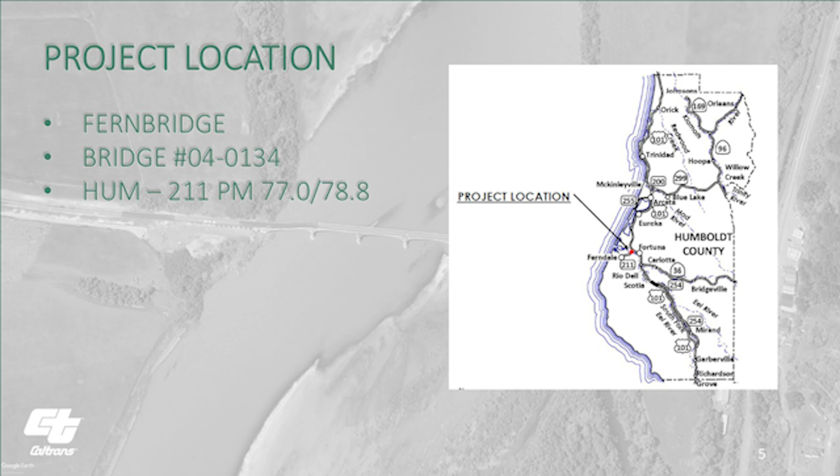Project location, as I'm sure we all know, but it's necessary to always cover this information. We're talking about Fernbridge. The Caltrans bridge number is 04-0134. It's in Humboldt County on Route 211, and post mile 77.0 to 78.8 represents the project limits.

Project background. As you all remember, emergency repairs were made immediately after the December 22 earthquake to restore essential traffic, minimize the extent of damage, and protect the remaining facilities. Once that was complete, and actually in the midst of completing that work, we initiated an improvement project, and we came to you all to announce that initiation of that project to identify solutions that will provide safe, sustainable, and reliable access to Ferndale.

The last portion of the emergency project was the installation of the seismic gates. We have done, I believe, most of the underground work to support the installation of these gates. There on the right, you'll see a rendering from each angle of the bridge that'll show approximately what it would look like.

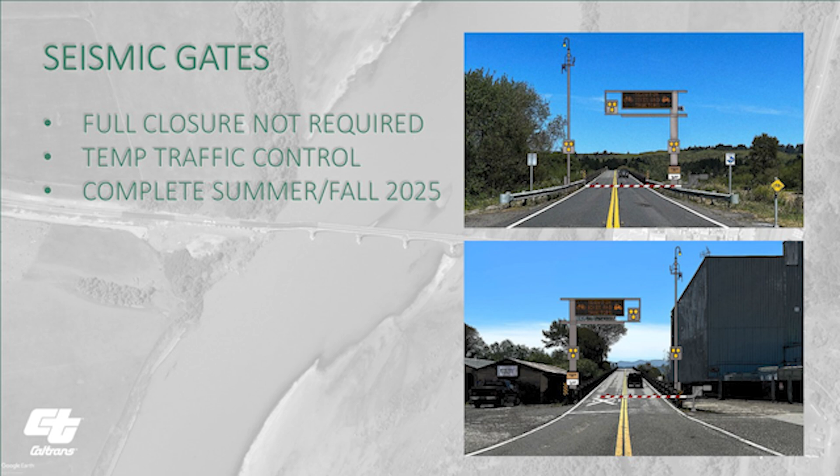We are not expecting a full closure in order to install the seismic gates, which I know is something people were concerned about because that's something we've had to do before for the emergency repairs. We do expect there will be some type of lane closure, but not a full closure. Really what we're waiting on right now is there's been a significant amount of lead time on some of the materials we need to install everything you see above the ground here, and that's really what's driving the schedule to get this work done. But we are optimistic that it may be complete by late summer or fall of this year. Once driving, you will not miss it once they are installed.

In terms of project development, this is also something you've seen in the past. This essentially covers all the different phases of project development for projects within Caltrans. We start in the planning phase with initiating an idea, whether it's, in this case, a bridge that needs some work and needs some repair. And then we immediately move into what's called the project initiation phase, and that's where we've been all these months since we initiated the project.

Now that we are complete with the project initiation phase and we've got what's called a project initiation report, that is also going to be available online for all of you to look at. It's going to include all the information that I will share today, but in a lot more detail. And now that we have that, that's essentially the document that we utilize to go to the California Transportation Commission to ask for the money we need to move the project into the next phase.

That next phase is the project approval and environmental document phase. It is one of the longest phases, maybe aside from construction, depending on the magnitude of a project that you have, which this one is a significant magnitude and effort to build. But in terms of the phases that we are, not building to the end of the design phase, PA&ED is our longest phase. It's where we're writing the environmental document, doing a lot of structural analysis, preliminary engineering, coordinating with the resource agencies, figuring out our mitigation and various other things.

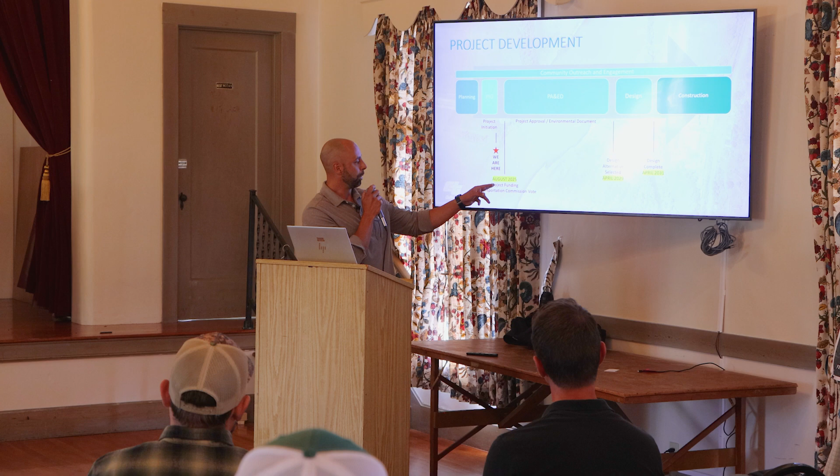Actually, I'm going to back up a slide because I missed that timeline portion. So we plan to vote the funds for the next phase next month, in August 2025. Our target date for completing this project approval and environmental document phase will be April 2029.

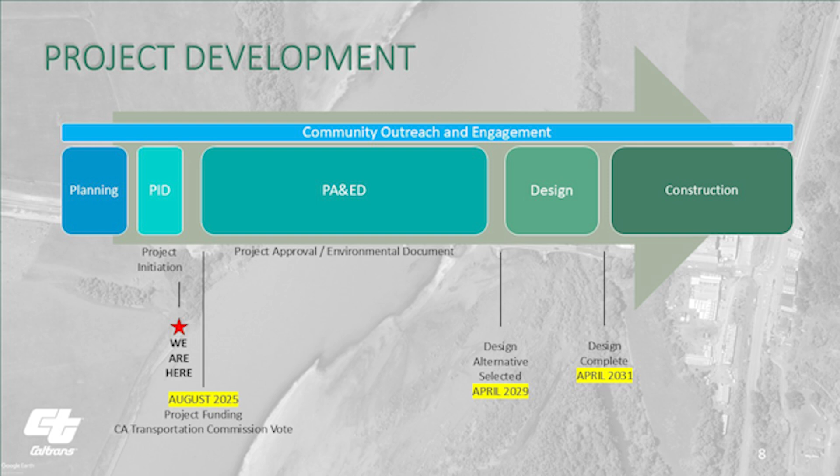So we're looking at just under 4 years to get there. Once we've reached that milestone, our target to complete the design phase would be April 2031, so about 2 years to design. I don't have a time frame on construction, because depending on the alternative selected, that time frame can change—not significantly, but there is a distinction between the different alternatives we'll talk about soon.

Project purpose: every single project within our department has a very specific purpose and need. That purpose and need really puts the sideboards on how we develop a project, what's included in it, and what our objective is and what we're trying to achieve.

The purpose of this project is to restore reliable access to and from the city of Ferndale for all roadway users, which includes providing a structurally resilient bridge that meets current bridge design standards, reducing risk of damage from future events.

The project need: Fernbridge provides the most direct route to and from the city of Ferndale, and on December 20th, 2022, a 6.4 magnitude earthquake with an epicenter approximately 10 miles southwest of Ferndale damaged the road surface and bridge approaches. Monitoring sensors installed on the bridge indicated a permanent change in vertical pier alignment and increases in crack width on piers 2, 3, 4, and 5.

Emergency repairs were made immediately after the earthquake to restore essential traffic, minimize the extent of damage, and protect the remaining facilities. A permanent solution is needed for the bridge to be more resilient and reduce the risk of damage from future events.

So, alternatives. In terms of rehabilitation—and I mentioned this earlier regarding the project approval and environmental document phase—going into this alternatives analysis, as well as the structural analysis that Grant's group is going to be very busy with soon, we still don't really know what the feasibility is of rehabilitating the bridge.

Alternative 1 would rehabilitate the bridge at its existing width, so the width you see out there today would be the width you have post-project, with no shoulders and lane widths of about 11 feet 4 inches. Alternative 2 would rehabilitate the bridge but widen the bridge deck to achieve standard lane widths and shoulder widths, which would be 12-foot lanes and 8-foot shoulders.

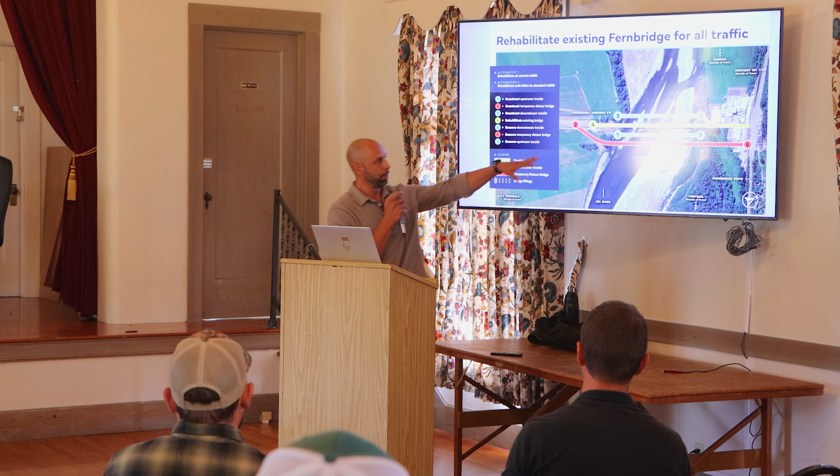This shows you all of these lines, but we are not planning to build 4 bridges, we're just going to build 1. This shows the various steps we would take to achieve the end result. After going through all of these alternatives, I will show you sequenced individual steps, which should help you better understand what's going on. Step 1 is to construct an upstream trestle. Trestles, when I reference those, are essentially just a construction work surface that all the construction equipment would be working from.

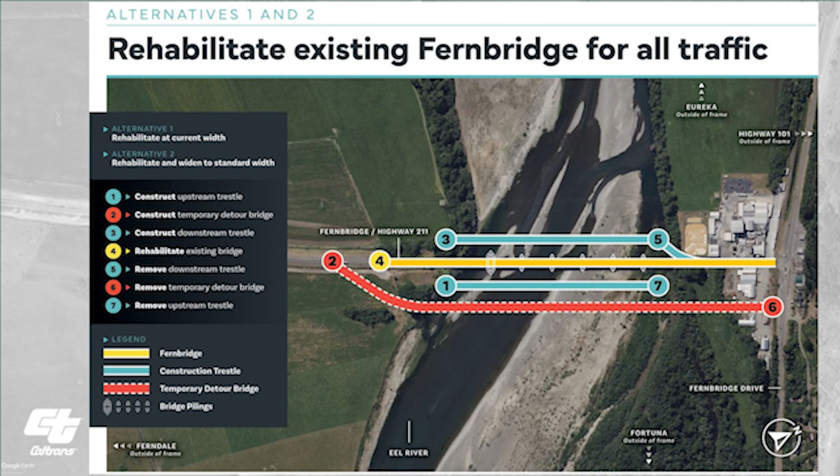That trestle is temporary. Step 2, in this case, we would need a temporary detour bridge, shown in red, and we would construct it next. Step 3, we would construct a downstream trestle to perform work from. Step 4, in yellow, we would do the rehabilitation work on the existing bridge. Step 5 shows we would remove the downstream trestle. Step 6, we would remove the temporary detour bridge in red. And the last stage, stage 7, we would remove that upstream trestle. It'll make a lot more sense once I get to the sequence.

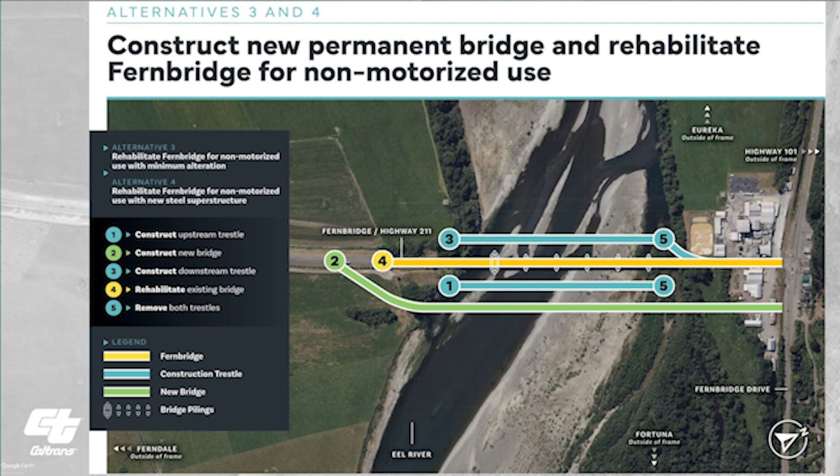Alternatives 3 and 4 are very similar, just one distinction between them. Essentially, they construct a new permanent bridge, shown here in green, and they will rehabilitate the existing Fernbridge, shown in yellow, for non-motorized users such as pedestrians and cyclists. The first stage would be to construct the upstream trestle, stage 2 would construct the new bridge, stage 3 would construct a downstream trestle, stage 4 would do the rehabilitation work utilizing those two trestles, and stage 5 would remove both trestles. You'd be left with a new bridge in green for motorized traffic, and yellow used for pedestrians and cyclists.

Something I wanted to mention is that no decision has been made whatsoever on the location of a new bridge or the location of a temporary bridge, especially for the replacement alignments. It's really conceptual at this point, and that's not even a conversation we've had with the community yet. Adjacent to the bridge is a logical point to put it, but we haven't had those discussions - they will occur in this next phase of the project, and we'll include your input and involvement in that.

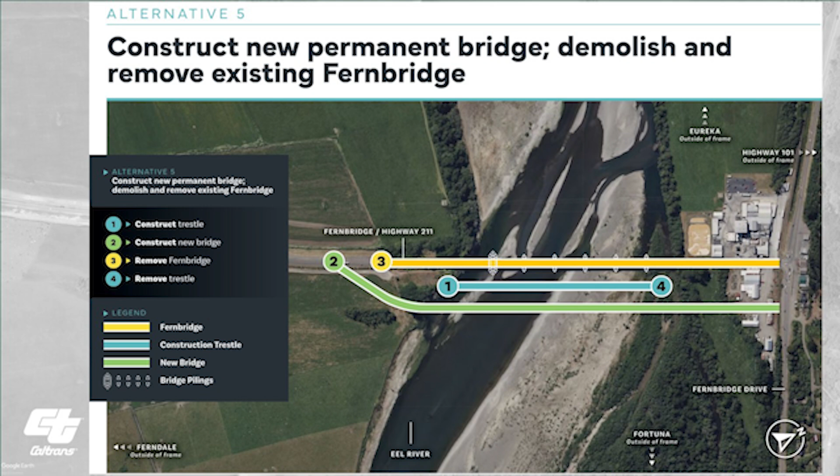Alternative 5 would construct a new bridge, shown in green, and would demolish and remove the existing Fernbridge. Stage 1 would be to construct the trestle in blue. Stage 2, construct the new bridge in green. Stage 3, we would remove Fernbridge, shown in yellow. And stage 4, we would remove the temporary trestle.

Alternative 6 would construct a new permanent bridge and leave Fernbridge in some sort of a monument state. Defining what that looks like has not been decided - it could be leaving the bridge as it stands, or leaving just the piers as something the community could see as a historical portion of the bridge, but that hasn't been defined. There's a lot of conversations that would need to take place about that, also from a safety perspective, with people recreating under the bridge, and you have a bridge that's being left, maybe not maintained, as a historic landmark. So more conversations need to take place about that.

With this one, stage 1 would be to construct the temporary trestle in blue, stage 2, construct the new bridge in green, and then stage 3, remove the trestle. So you'd be left with some portion of the existing bridge as a historical landmark and the new bridge in green. This alternative, in terms of the funding we are going for to the California Transportation Commission, this is the alternative we are seeking the money for.

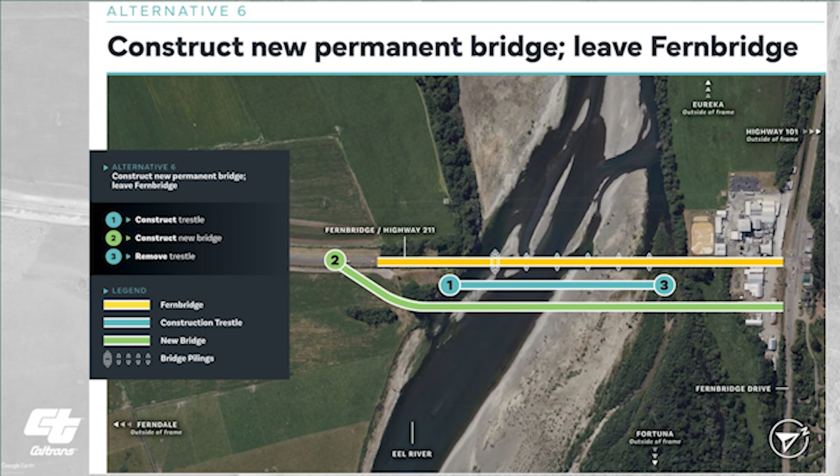Not because this alternative is one the department favors, it's actually the least costly alternative and we feel like it's a good starting point, but in no way does the department going for the money that matches the estimate for this alternative mean that we're locked in any way more so to this alternative than any other. So we have methods and ways to deal with change management when it comes to cost changes and whatnot. But this is the alternative that matches with the funding request we're making next month, as you'll see when you read the project initiation report.

And then the last alternative, alternative 7, will remove existing Fernbridge and construct a new permanent bridge on its existing alignment. So the new bridge would be where Fernbridge is today. Stage 1, construct the work trestle in blue. Stage 2, construct the temporary bridge in red. Stage 3, we would then remove the existing Fernbridge structure. Stage 4, we'd build a new one in its place. Stage 5, we would remove the temporary detour bridge in red. And stage 6, we would remove the temporary trestle.

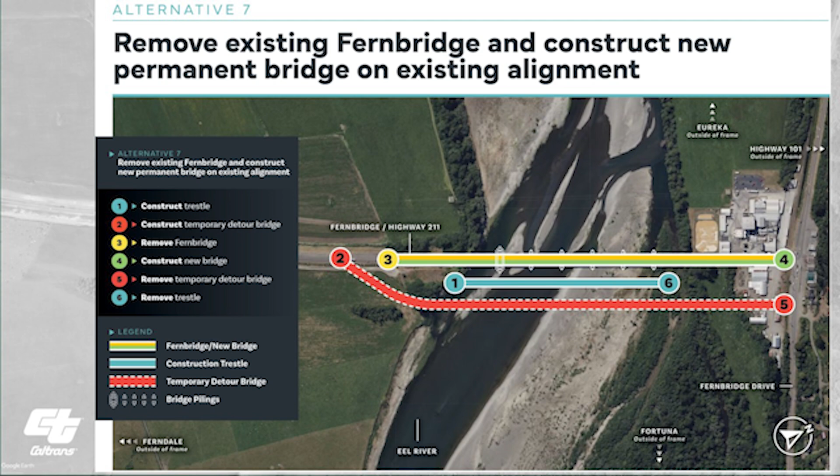Okay, lane widths. I mentioned this when I was going through the alternatives, but here's just a table to show you. Alternative 1, where we are proposing to rehabilitate the existing bridge at its existing width with no widening, would be left with 0 shoulders, as essentially you have out there today, and then lane widths of 11 feet 4 inches, and no separated pedestrian path.

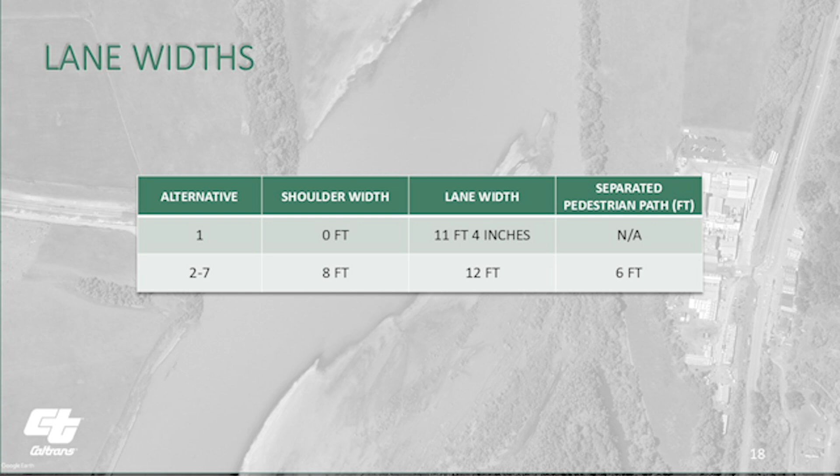Alternatives 2 through 7, for the bridge that you will be driving on, and I want to say that because in 2 of the alternatives we are proposing to convert the existing Fernbridge to a pedestrian and cyclist bridge. But this references lane widths for vehicles. So alternatives 2 through 7, you would be left with an 8-foot shoulder and 12-foot travel lanes. And then we're also proposing a separated pedestrian and cyclist path that would be 6 feet in width, separated by a physical barrier of some kind that would be vehicle resistant. It wouldn't just be a stripe on the road - there would actually be a physical barrier there.

Okay, now the construction staging example, and I think this will make a little bit more sense. So this is mimicking or modeling what a construction sequence would look like for alternatives 1 or 2. So existing Fernbridge there in the middle of your screen. First stage, we would construct the upstream trestle. Stage 2, we would construct the temporary detour bridge. Stage 3, we would construct the downstream trestle.

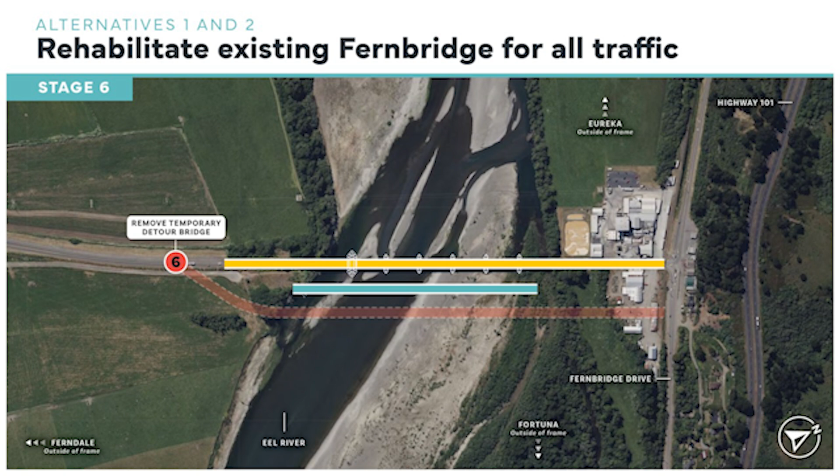In stage 4, we would do the actual rehabilitation work to the existing structure, Fernbridge. And then stage 5, we would remove the downstream trestle. Stage 6, we would remove the temporary detour bridge. And then stage 7, we'd remove the upstream trestle. So I don't know if my explanation earlier matched that or not, but I know it helps me visualize it seeing this.

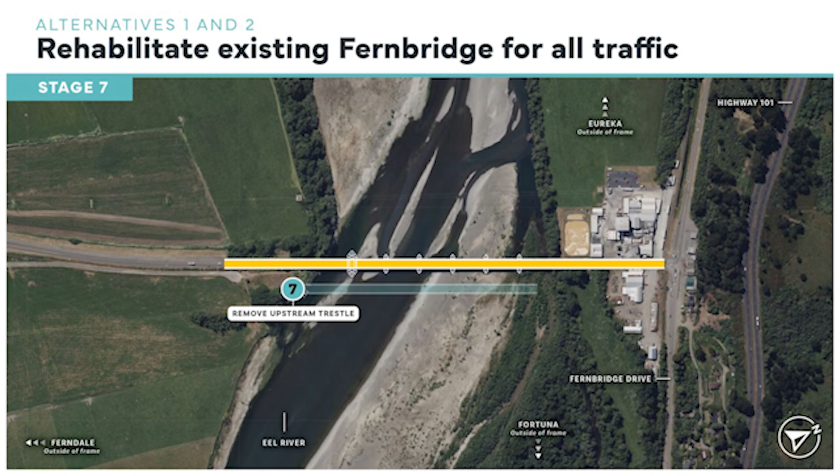Okay, so now moving on to environmental topics surrounding the project. We are proposing to have an environmental impact report under the California Environmental Quality Act, CEQA, and then under NEPA, the National Environmental Policy Act, we will have what's called an environmental assessment.

In terms of impacts and mitigation, we don't really have it yet. We have done estimates, which you can find in our project initiation report, with regards to impacts across all the alternatives. But those estimates are very preliminary. They're based off a lot of assumptions. Staff has not been able to go out in the field on the ground to the level we really need to quantify our impacts. And we don't really understand enough yet about the alternatives to be able to understand the impacts of each.

But that is something this next phase is essentially meant for. So I'm not going to be sharing numbers because they don't really mean a whole lot at this point. But again, those estimates are in that report, which will be online, so you can access that. Just to give you a little bit of background on how we address impacts and mitigation on projects such as this one, our first preference is to avoid any impacts that we can.

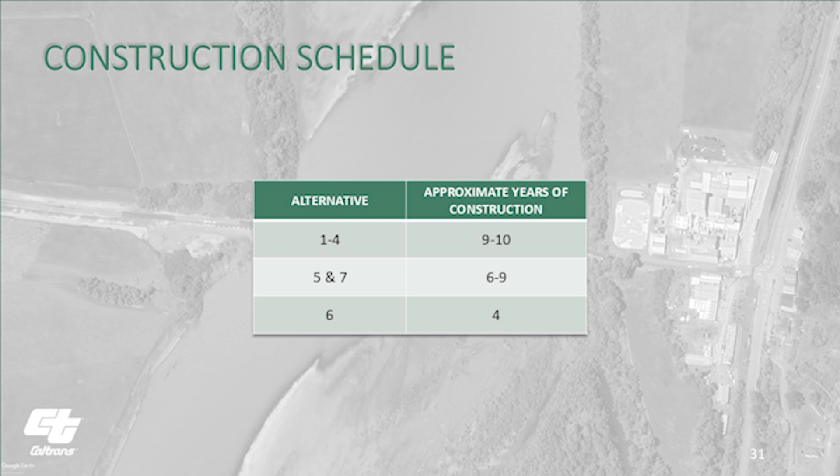Right-of-way will cover acquisition of land we may need, temporary construction easements, and mitigation, which is typically folded into a large portion of our right-of-way costs, plus construction capital — that's the cost to actually build the project. None of these costs represent the staff time, design work, and analysis the department will go through to develop the project. This is simply the capital dollars to construct, purchase right-of-way, perform mitigation, and pay for our permits.